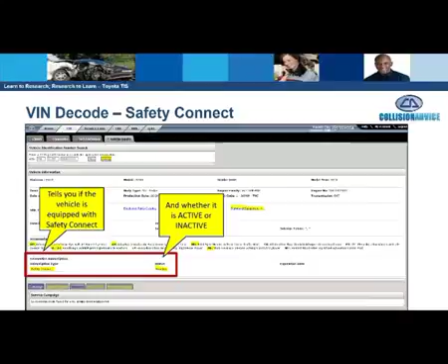If you do not, then Toyota could be notified when you start disassembling the vehicle, and in Toyota's mind, they may think there's a problem with the vehicle, and then they contact the customer, and the customer may end up getting an email. So it's very important for you as a collision repairer to decode the VIN in TIS so you can see if they subscribe to Safety Connect or not.

Now, here's an example we found when we found a vehicle that was subscribed to Safety Connect. This was a 2018 Toyota Camry. We actually saw an option here that says when automatic collision notification is activated, there's a process you have to go through to disable this. This is going to be very important to all collision repairers in the future before you begin work on any Toyota Lexus vehicle, to understand if the customer subscribes to Safety Connect.

Now, another thing you will see is when you decode the VIN, it also gives you all the vehicle options. I really like this because this helps me to make sure I select the right part on the estimate the first time. The other thing is some of these keywords like navigation, intuitive park assist. These are some of the things that I'm going to be using in the search feature later on to determine how to do a proper repair on this vehicle.

Here's another benefit of understanding the build data. You know, if you were to go and fix a Toyota Camry, you would see on the side of the deck lid it says SE. So I know when I go to write my estimate, I need to select the parts for an SE.

However, as many of you are probably aware, when I go to write an estimate on a Toyota Prius, it will only say on the deck lid that it's a Prius or a hybrid. It will not have an emblem such as the Camry does with the SE. So I will not know what the trim code is on that vehicle. And if I don't know the trim code, I may not select the right part.

A lot of times the estimating system, CCC, Mitchell, Audatex, while they do get some build information from the OEM manufacturers, they can't always drill down and tell you what trim package is on that vehicle. So the only way you would know is to either decode the vehicle through TIS or call your local dealership, so we can select the right part the first time.

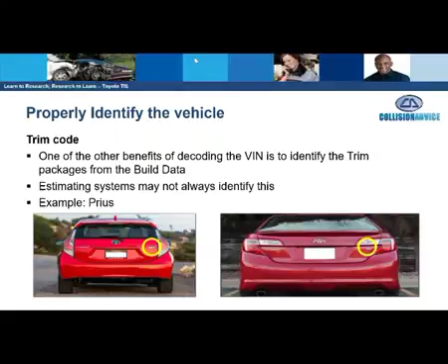Okay, let's continue on. So, now what's in the library tab? So again, when I go back here into TIS and I log in, you're going to see a tab that says TIS. And when it opens up, you're going to see several options: library, diagnostics, tech assist, or vehicle inquiry. Now, vehicle inquiry was obviously where I put the VIN number of the vehicle in, and it decoded it for me. The other tab that you're probably going to most commonly use is going to be the library tab. Now, when I select the library tab, you're going to see several tabs along the bottom. So let's share with you what some of these tabs mean. The first tab you'll see on the left-hand side is the summary. This is going to have a summary of all manuals.

The second tab is SB-TT, and that stands for Service Bulletins and Tech Tips. It is in this area that you might find some technical tips as well as service bulletins that may pertain to something like scanning. Then you have QTG, which stands for Quick Training Guides. This would be some quick training guides that might tell you how to perform, for example, a 0-point calibration. And then you have RM, which stands for Repair Manual.

I will tell you that if I had to pick the 2 tabs that you will utilize the most as a collision repairer, RM will be the first. The Repair Manual is the tab you're going to select that's going to tell you how to take a vehicle apart. If you've never had a bumper off before, you've never had a fender off before, it's going to tell you how to remove that component. It's also going to have your different specifications, any work notices, precautions, or calibrations.

The next tab is EWD, which is electrical wiring diagrams. And then we have NCF, which stands for New Car Features. We're not going to get a chance to talk too much about this tab today in the webinar due to the time restraints. However, I want you to know that I love this tab. I like to look at this tab because it tells me any new substrates that may be on the vehicle, as well as any new pre-accident or pre-collision avoidance systems.

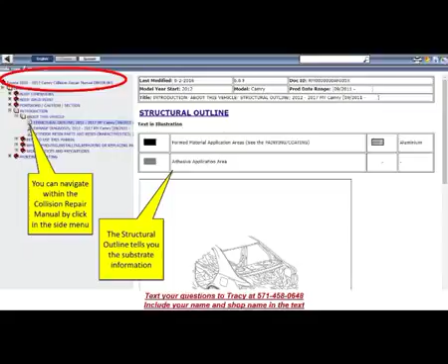So you'll see, for example, the structural outline is how we found out what this vehicle was actually made out of, what components it was made out of. In some cases, maybe if it was a hood, it would show you the hood was aluminum, for example. Now, here's one of the other things I liked about it: it's also going to show you on the structural outline what types of steels are on this vehicle. And this is very, very important to you in regards to whether that component can be repaired or replaced or sectioned or not.

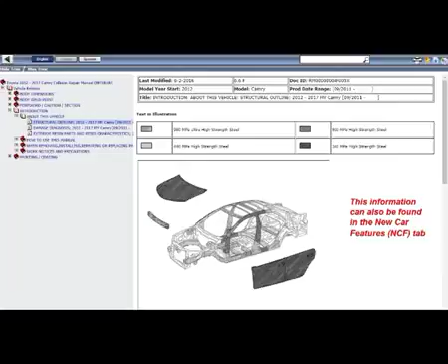Keep in mind, also, these new types of metals used in the vehicle's manufacturing process can also be found in the NCF or New Car Features tab. Now, I'm going to share with you my favorite thing. I've got a lot of things in TIS I love, but this was my favorite. There was something called a damage diagnosis document.

So I went into CR, which is the Collision Repair Manual tab. I then navigated the decision tree down to where it says damage diagnosis, and you'll see that's right under the introduction tab. I love this damage diagnosis document. I've never seen anything like this with any other vehicle manufacturer. And let me tell you what this does. This shows you, based on this specific vehicle, if this vehicle is in an accident, how the inertia forces are designed to transfer throughout the vehicle.

Now, let me tell you why that's important, because that's going to tell me as an estimator or a technician where I need to look for damage. So for example, I'm going to switch to the next page here, and again, this comes right out of Toyota TIS. It's called the damage diagnosis document. And it tells me if a vehicle was hit along this bumper reinforcement, the inertia forces are designed to travel up along the A-pillar, along the roof area, as well as down low along the rocker panel.

But it's telling me areas like number 1, 2, 3, 4, 5 are areas that Toyota designed to give. Some people might call these crush zones, right? So I know on this specific 2018 Toyota Camry, I need to inspect those areas. Now, this may mean that I've got to remove the cowl cover and the wiper arms to look at the cowl area. Well, you know what? If that's what you have to do, that's what you have to do. I would encourage you to itemize that on your estimate, along with a line note on what made you remove those components. But I love this document from Toyota.

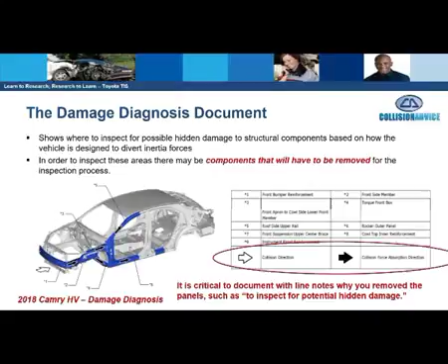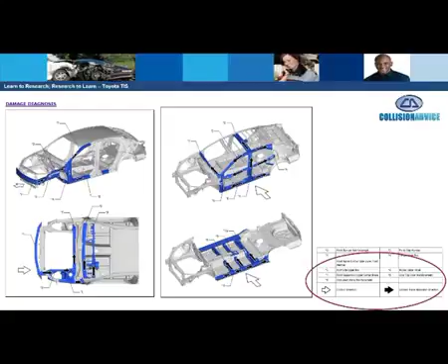Here's another example of a damage diagnosis document showing you that this vehicle got hit on the side, where the center pillar is. It's actually made to divert the inertia forces along the door intrusion beam and direct that across the firewall. I've got to tell you, in my lifetime, I didn't always look at the firewall for damage, but I will from now on, thanks to Toyota's damage diagnosis document.

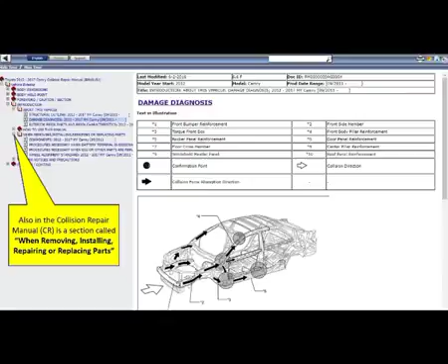Here's another cool thing we found in TIS in the Collision Repair tab, and that is procedures needed when you disconnect a battery or R&I other parts. So again, we went to the Collision Repair Manual, and in the decision tree on the left-hand side, we saw a little arrow that says, when removing and installing, repairing, or replacing parts. So we selected this, and you'll see something came up that said procedures necessary when a battery terminal is disconnected or reconnected.

Well, I got to tell you, if you go to replace a fender on some Toyotas, there's a ground wire that you have to disconnect. But before I do that, I have to disconnect the battery.

In this case, if I would not have researched this and disconnected the battery without going back to correct the steering angle neutral point afterward, the parking assist monitor system would not work, and that could lead to a consumer having an accident. Yeah, you heard it right.

When we disconnect a battery, not just on a Toyota but any vehicle, like a Lexus, you need to research to see what procedures are necessary when you disconnect the battery terminal. By the way, I got to give a shout out to my friend Jake Rodenroth with asTech, because he's the one that taught me about this.

So again, anytime you're going to disconnect a battery on a Toyota or Lexus vehicle, you need to research under the Collision Repair Manual tab what procedures are necessary. The other good thing about this is it shows you what the possible problem could be if you don't do this procedure.

You'll look right here, it tells me that when I disconnect the ECU, there are other things I have to do as well. Or let's go a step further.

How about this one? When I go to replace a door or a door window regulator, it tells me that I actually have to initialize the power window control system. If I don't, the up and down function won't work, and some of the other things won't work as well. So at the end of the day, it's important that when we disconnect any type of component, we go to this section of TIS to see what types of initializations or calibrations we need to do.

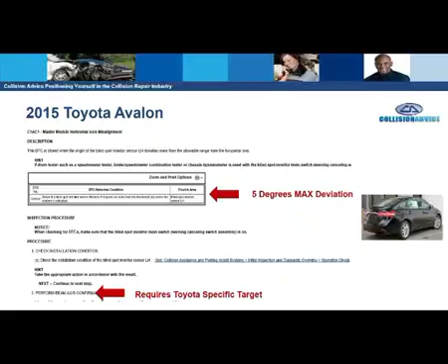So what we did is we said, let's go to the authority, which is TIS. We went back to the collision repair manual, navigated the decision tree on the left-hand side, and found a section with plus signs that says 'removing, installing, repairing and replacing parts.' Once we selected that, it dropped down and there was a tab that said 'precautions for blind spot monitor.'

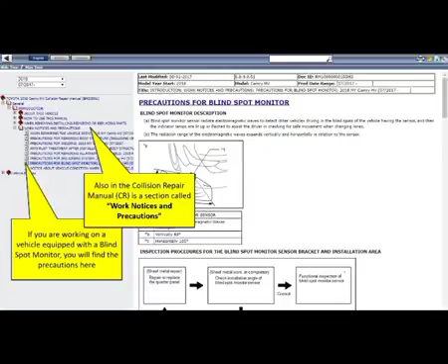So we researched this, and one of the things we saw was that Toyota actually says: repair or replace the quarter panel, then check the installation angle of the blind spot monitor sensor. And if the blind spot monitor sensor will not align properly, go back and either re-repair or replace the quarter panel.

So what we need to understand is, it's not just about calibrating the blind spot monitor after the vehicle's been completed. It's about actually checking the angle of the blind spot monitor before you paint the vehicle. So even if you replace the quarter panel, you should check the angle of the blind spot monitor. That also could include reinstalling the blind spot monitor and the bumper cover, and then after we take them back off, paint the vehicle, we have to reinstall them again.

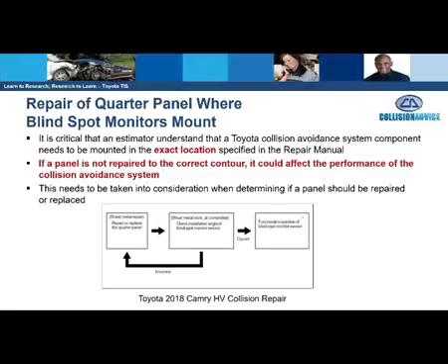So this comes directly from Toyota. You'll see what Toyota says right here in TIS. And by the way, Toyota has a publication they publish quarterly called the Collision Pros magazine. This actually came right out of the Collision Pros magazine produced by Toyota in the summer of 2017.

It says, when you repair or replace the quarter panel, check the installation angle and the orientation of the blind spot monitor. Then you will refinish the vehicle. Once you refinish the vehicle, you'll have to go back and calibrate the blind spot monitor. Keep in mind, the initial orientation and installation angle check will be done with a plumb bob, and there's a certain procedure through Toyota TIS. The calibration requires the use of a factory scan tool as well as a very specific target.

Another thing we learned about was, a lot of times we see people really focused on repair versus replace, and we understand that as an industry. But we want to say, with all these new active avoidance systems, how do I know if I can actually use any filler material to repair this bumper cover? It's a big concern that I would have as a collision repairer. So one of the things we did was reach out to Toyota and ask, how will I know if it's okay for me to fix this bumper cover or not?

Toyota taught us to go into the collision repair manual and navigate to the decision tree. You'll drop down and see where it says precautions for blind spot monitor, and you'll see what Toyota says in TIS.

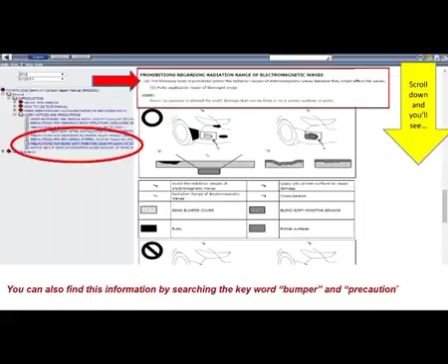Now let's talk a little bit about welding. When we go to the collision repair manual, welding is a big deal. Navigate down to the left side of the tree and you'll see where it says precautions for welding. When selected, it tells us a lot about what we need to do for a proper repair involving welding. You'll notice it says if the paint film is damaged, make sure you refinish the part.

What are they speaking of? Weld burn damage. So if you weld in a new quarter panel or rocker panel, Toyota insists that you must prime and paint those adjacent panels from weld damage.

In this same tab, if you scroll down, it tells you the types of welds, wire type, or gas needed, as well as the number of welds you may need. This is really important to make sure you're using the right welder with the right type of weld, gas type, and wire type.

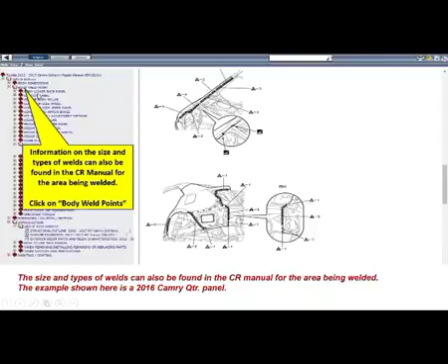In addition, in this same section, you'll see something called a body weld point. If I click on this, the next thing I'll do is drop down to where it says quarter panel, because it shows me everything that welds into a Toyota.

If I click on quarter panel, for example, it shows me exactly where this quarter panel is intended to be welded, where it's supposed to be replaced, what types of welds, etc. So go to body weld point, and it'll show you all the different components that weld into a Toyota and the proper welding procedure.

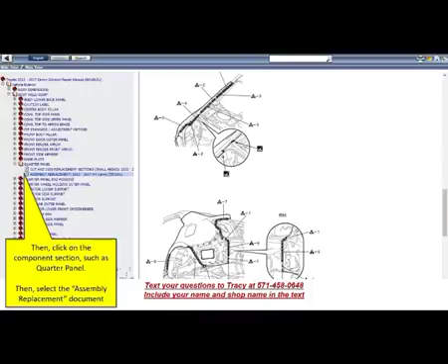You'll also see in this same section, as I scroll down, if there's any panel bonding adhesive required by Toyota. You'll see that Toyota calls out a very specific part number, which in this case is 3M panel bonding adhesive 8115.

It's always important to only use the adhesives approved by the vehicle manufacturer. If another company tells you it's okay to use their product, but it's not approved by the OEM and you don't see it in the OEM repair procedures, do not use that stuff.

What else does Toyota say about welding? First, Toyota states the battery should be disconnected prior to welding. Toyota states that any electronics within 18 inches of the weld site should be removed. For example, if you're replacing a quarter panel, you may have to remove an airbag sensor, the overhead airbag, the wiring harness, a speaker, etc.

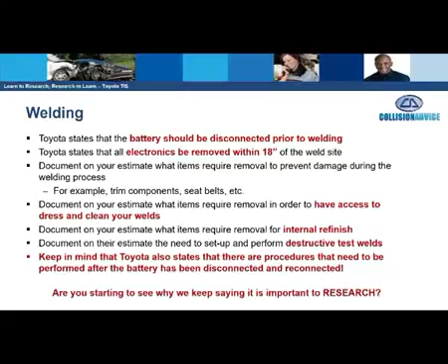Also think about what types of things you need to remove from that Toyota or Lexus in order to dress and clean your welds. Toyota also states that you need to set up and perform destructive test welds before welding on one of their vehicles. Keep in mind that if Toyota says to disconnect the battery before welding, we also need to understand what procedures we may need to reinitialize or recalibrate when we reconnect the battery. Toyota actually has something called a CRIB bulletin.

That is collision repair information bulletin number 161 that says disconnect the negative battery terminal and remove any electronic units within 18 inches of weld sites. Now this is really important because other vehicle manufacturers only say 12 inches. iCar states 12 inches, Toyota says 18, and the same would apply for Lexus.

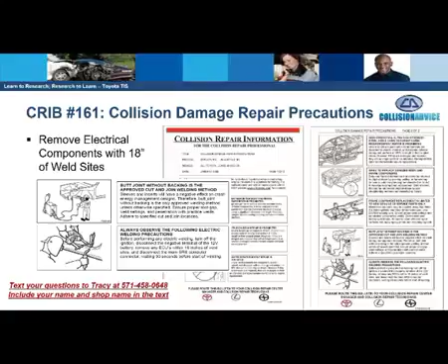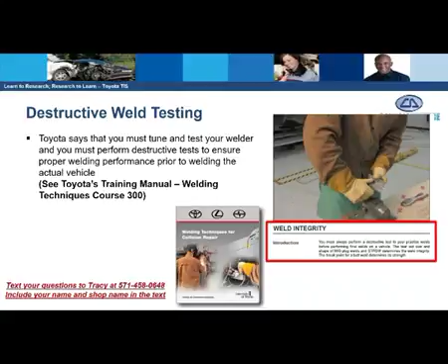You also see here that if you were to become Toyota certified and take a welding test for Toyota certification, Toyota clearly states in their training manual that you must always perform a destructive test on your practice welds before performing final welds on a vehicle. Keep in mind, a destructive test weld is also a not-included operation. If you're not sure, submit an inquiry to www.degweb.org, and Danny from the DEG would be glad to get you an answer on that from CCC, Mitchell, Audatex. But performing destructive test welds is required by Toyota and is a not-included operation.

You also see that Toyota has a CRIB bulletin on this, Bulletin 181.

Tracy, you said we have another question. We do, a couple people want to know, can independent shops be Toyota certified? Currently today, you cannot be a Toyota certified shop unless you're owned by a dealership. However, if you have sponsorship from your dealership, you can send your employees to factory training. You will not be certified, but you can still gain the factory training that certified shops go to. But currently, you cannot be a certified body shop unless you're owned by a Toyota dealership. Again, Toyota training is available to you if your dealership will sponsor you.

Augie, did I get that correct, sir? Yes, absolutely. Independents can get factory training, and basically that's the most important thing in our industry, to repair Toyota and Lexus vehicles correctly and safely for our customers.

Thank you, Augie. Another question, Augie: is there a list of approved welding equipment on TIS? Toyota does not endorse or recommend specific equipment or require specific brand names. What Toyota does, or Lexus for that case, is give you the specifications for the equipment. Is that correct, Augie? Correct. If you notice in the repair manual, it says you must use a welding machine that has inverter technology, at least 10,000 amps, with a capacity of 685 pounds pressure.

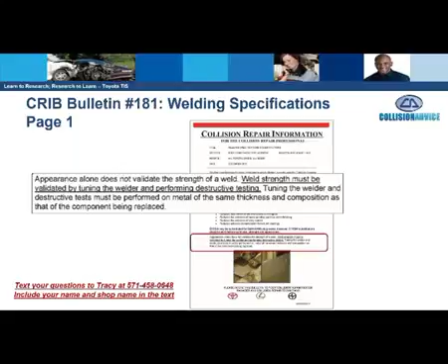Okay, we have a question from a body shop in California about blind spot monitors, and we're going to hold that question a little bit more until we get into it, Tracy. But we will answer your question. Okay, look right here what Toyota says also in TIS.

It says that your welding substitutions should match factory spot welds in size, strength, and appearance. If replacement welds are larger or smaller, resize the electrode contact tip to match, and do not weld over factory weld locations. My question for you is, how would this influence your decisions on LKQ or salvage quarter panels? At the end of the day, I don't believe my opinion means anything. I think the only thing that matters is what I can prove, substantiate, or justify. When it comes to used quarter panels, I would have to question you: can you actually match the factory spot welds in size, strength, and appearance? I think you would find, in putting a used quarter panel on, you would not.

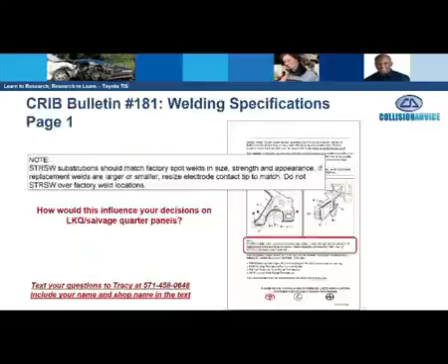Now, how do you find these crib bulletins? A lot of times people talk about crib bulletins. Well, first of all, what you can do is go into TIS, into the CR tab, which is collision repair, and where it says keyword, you can type in the word crib, or if you know exactly what you're looking for, crib welding, and that is how it will pull up all of your crib bulletins for you to see. Now, some of the other things Toyota has in TIS is under the collision repair manual.

You'll see here on the left-hand side in the decision tree, it says work notices and precautions. When I look at this, this is where I'm going to find precautions that Toyota may have, like not to repair a door intrusion beam, or not to repair a bumper reinforcement. That's where you're going to find those types of information.

However, one of the other things you'll find is where Toyota has very specific requirements into how you attach a Toyota or Lexus vehicle to the pinch welds. You'll see that Toyota very clearly states, and this would be in the United States Toyota crib bulletin 57, and if you're in Canada, it would be 2027, that you must remove all coatings at contact locations that may build up on clamps and reduce their gripping ability.

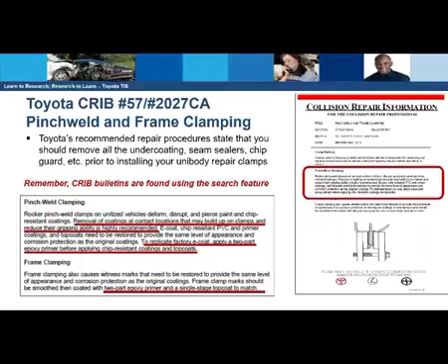So at the end of the day, we need to make sure that we remove any undercoating or seam sealer from the pinch welds before we put a clamp on a pinch weld. Understand again, how would you classify that on an estimate? That might be prep pinch welds before and after clamp installation. But clearly understand, if you're taking and putting a clamp over undercoating or seam sealer on the pinch welds of a Toyota or Lexus, they consider that an improper repair.

Sectioning locations. How do I know when and where I can section something? Well, first of all, Toyota has a crib bulletin on that, crib bulletin 176, that has some very specific requirements in regards to what you can and cannot do in regards to repair methods. One of the things you'll see is on the right-hand side where it says methods not approved, it says butt joint with backing or a sleeve is not approved. If you're an estimator and you're writing on an estimate to use a sleeve when replacing a quarter panel or rocker on a Toyota, that is an improper repair, and it's important to ensure that your technicians are not doing that.

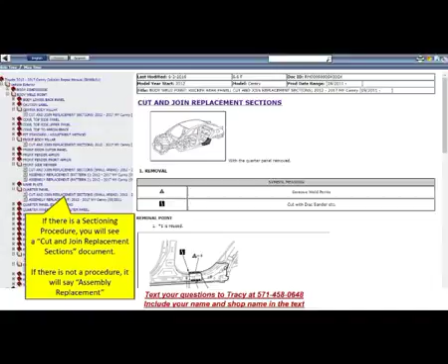Now, if I go to the decision tree again on the left-hand side, you'll see where it says body weld point. I'm going to click on that, and as I click on it, you'll see it drops down to a variety of panels. It also says, after I select a component, such as a quarter panel for example, it's going to come up, and that's where I'm going to find out if I can section that component or if I need to replace it in its entirety. So whether it's a quarter panel or a rocker panel, I'm going to go to body weld point, click on that, it's going to open up a decision tree, and then I will select the specific panel that I'm going to weld and replace. When I click on that, it will tell me if that panel can be sectioned or not, or where it needs to be installed at, again, the proper welds, etc.

Let's talk a little bit about adhesives.

Obviously, there's a court case that the industry is talking about quite a bit down in Texas, and it was a question about whether structural foams or adhesives could be utilized in repair. Toyota does recommend some panel adhesive, but it is in very limited applications. So the only way you can know for sure if a Toyota or Lexus vehicle says it's okay to use panel adhesive is if it is actually documented within TIS or on a CRIB bulletin.

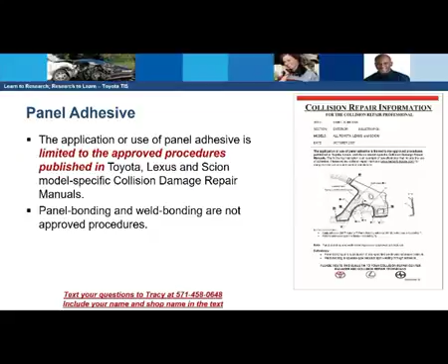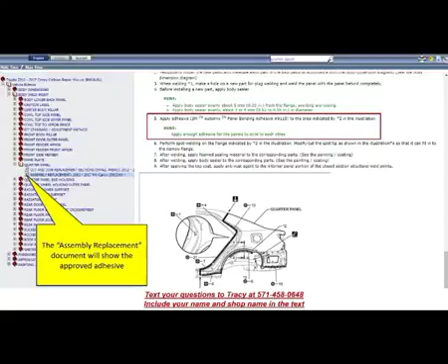You'll see here, for example, in this instance, I went to the body weld point. Once I selected that, I went to quarter panel. Once I selected quarter panel, it told me here in this instance that I could use 3M panel bonding adhesive 8115. So in this instance, in this specific area, and only in this specific area, can I use panel bonding adhesive, not in any other area.

Also, one of the other things that I think a lot of industry members are not aware of is most of these panel bonding adhesives have very specific cure times. If you look here at Toyota, for example, it says here that the vehicle must dry for 60 minutes at 60 degrees Celsius, which is 140 degrees Fahrenheit, or at 77 degrees Fahrenheit for 12 hours.

I hate to tell you how many shops I've been into where they put the adhesive on when they were using a quarter panel, and it just sat in the shop during lunch or something, and the very next thing you know, they rolled it over to the paint shop. Well, when you do that, you're moving that vehicle before it's completely cured. So make sure on all vehicles that you check the cure time on that adhesive before you move that vehicle after you replace the panel and utilize it.

Let's talk a little bit about corrosion protection. Toyota has a very good CRIB bulletin on this. It is CRIB bulletin 186. It tells you the different types of corrosion protection materials that are used on a Toyota or a Lexus or a Scion vehicle, and in some cases even recommends or specifies specific products.

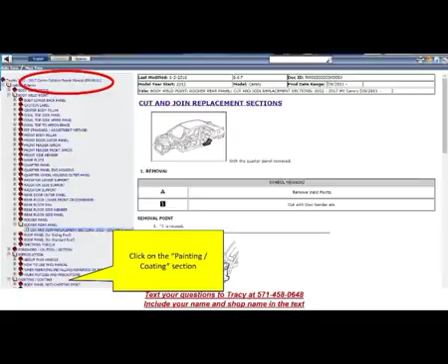Let's go back down here again, where I go to the Toyota Camry Collision Repair Manual tab. And when I drop down underneath body weld point, you'll see at the very bottom it says painting and coating. Once I select that, you will now see the different types of corrosion protection. So very clearly understand this: your corrosion protection information in Toyota's TIS is going to be under the painting and coating section.

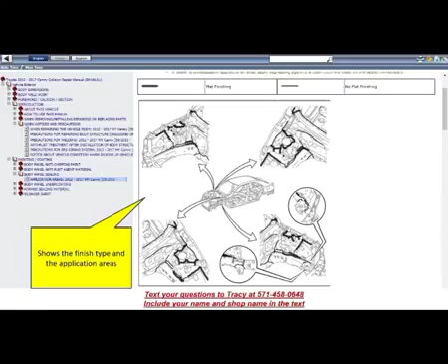When I go to that section, I will now see anti-chipping paint, which is like gravel guard, anti-rust agent, which would be things like cavity wax, then sealer, which is like seam sealing or foams, and then undercoating. So it's really important we go here, and it will actually tell us what type of finish is supposed to be on there. You'll see in this case, is it a flat finish or no flat finish? And it's going to show me the specific areas that are required to be seam sealed after the replacement of this panel.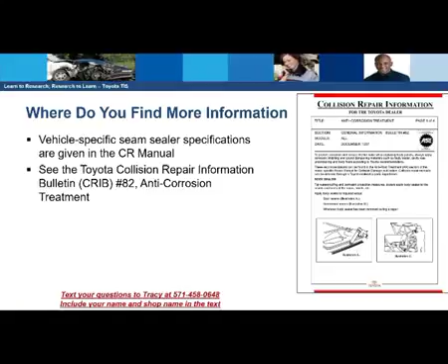Again, Toyota also has some very good CRIB bulletins on this, and another would be CRIB bulletin number 82. You will see here again, if I go to body weld point, I select that, I go to quarter panel, I go down to where it says cut and join replacement sections. Once I scroll down, you'll see again here, it tells me that I need to apply seam sealer to this very specific part.

Let's talk a little bit about painting, because a lot of times we look at OEM repair procedures and we think it's only important for the body man to know how to do certain things. But you know what? It's important to the painter too. And here's why. Many vehicle manufacturers, including Toyota today, are using what's called LUTs. LUTs are limited use toners. These are toners that are used very infrequently, and they only have a small number of colors. And most collision repair centers do not stock these LUTs.

So you would actually have to identify that this vehicle had an LUT, limited use toner, during the estimating process, so we could contact our jobber and get the toner in time. Also keep in mind that Toyota now actually has some quad coats. So when we go into TIS, we're going to go to vehicle inquiry, we're going to decode the VIN, and you'll see at the very bottom it tells me PC, which is paint code.

It tells me PC is special color. That this vehicle is exterior color 03T7 hypersonic red, but you'll see where it says accessories. This vehicle has a special paint code on it. That tells me automatically that I probably need to research this on my paint scale, because it may require a limited use toner that I need to contact my jobber or paint manufacturer to get in advance.

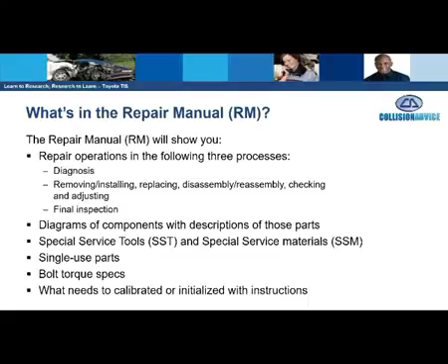So let's go ahead and show you a little bit about what the repair manual tab will provide you throughout TIS. First of all, if I go to the RM tab, repair manual, and then I go down and I just select any of these little icons I see there. So any one of these, once I select those, it's automatically going to pop up my decision tree. Now I will go down to where it says vehicle exterior or vehicle interior.

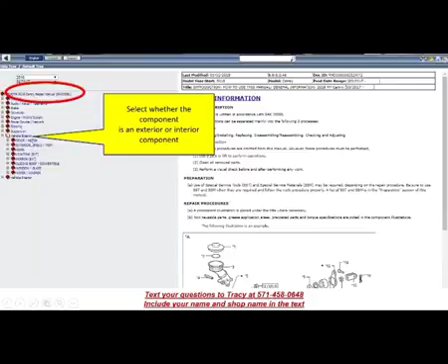If I go to the vehicle exterior tab, for example, and I click on trim, and then I click on the rear bumper, you will see here that it automatically pulls up for me and tells me what I need to do in order to remove and replace that bumper.

However, not just does it tell me what I need to do to remove the bumper, but it tells me that there are some necessary procedures such as measurement of ultrasonic sensor detection angles and also ultrasonic sensor detection angle registration. And it tells me that if I do not do this procedure, then these things over on the right-hand side will be inoperative. So understand, this is something as simple as I just removed the bumper.

So the vehicle was key scratched. It was not even in an accident. It's just a key scratch. But I had to remove the bumper cover in order to paint the quarter panel. Well, after I removed the bumper cover, you can clearly see here that Toyota says there are some recalibrations that need to be done in regards to the ultrasonic sensor detection angle. Understand there are a lot of things that require the utilization of a scan tool that don't involve scanning.

One of the other things I'd like to point out to you is anytime you see one of these little blue boxes that says info, that will be a hyperlink, and when you click on that, it will open up and show you more information. So let's look here for example, right? It says necessary procedure after parts are removed. Once I remove a bumper, I actually have to do this necessary procedure, and if I don't, these things on the right side will not work. You can see down here, step by step, it tells me how I actually need to do this process.

Now, this was something that was shared to us by some of our good friends in Canada. This was a 2018 Toyota Camry. And this vehicle has a feature that's called Park Assist Monitoring, Intelligent Clearance Sonar System. So here's what we need to understand. In this case here, all I did was remove the bumper cover. It wasn't even an accident. I just removed the bumper cover.

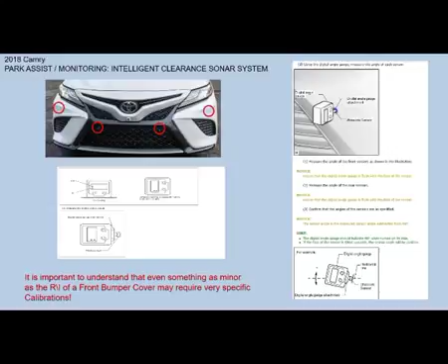However, more importantly, when we go over here, we will see that Toyota says further in TIS, when the front bumper is damaged or deformed due to an accident or contact with other objects, or the bumper installation is repaired, it is necessary to perform millimeter wave radar sensor adjustment. It says it is necessary.

You know, I know we got a question earlier about why Toyota sometimes does not use really strong language like required, and they just use recommended. I will tell you in the position statements, you will generally find verbiage like recommended, but where you find the strong words is when you really dig down into TIS, like in this case where it says it's necessary.

You also see right here that Toyota also says, when replacing the windshield glass of a vehicle equipped with a forward recognition camera, make sure to use a Toyota genuine part. If a non-Toyota genuine part is used, the forward recognition camera may not be able to be installed due to a missing bracket, or the lane departure alert system, forward recognition camera system, et cetera.

And the bottom line is basically what it's telling us is that these safety systems may not work properly if we use an aftermarket windshield. All of this, again, would be found under the repair manual tab, and you would find this specific example under removal of the windshield.

Let's talk a little bit about special service tools and special service materials. Special service tools and materials can be found under the RM or the repair manual tab. Once I select the repair manual tab, my decision tree will pop up. I will go into where it says preparation. Again, I'll say that word again, preparation.

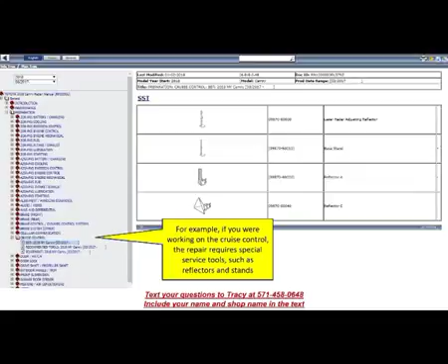So it's not just enough to have a scan tool, it's going to show me the specific targets that I'm going to need. You will see also here that if I look at the door latch and the door hatch, it actually tells me there is a specific adhesive that is needed for this area as well, and it gives me the part number.

Let's talk about non-reusable parts. One of the things that Toyota does a great job of in their Toyota TIS is it shows you a symbol to indicate when a part is non-reusable. That means a one-time use part, and that is anytime you see a black dot.

So if you're taking this webinar right now, I'd like you to take a pen or pencil and make a note somewhere and draw yourself a dot. Anytime you're in TIS and you're in the OEM repair procedures and you see a black dot, it means that part is one-time use and it must be replaced, even if it's not identified in the estimating system.

So if you look here, Toyota actually has a key. A black dot means a non-reusable part. The arrow means that part requires a multi-purpose grease, and the asterisk means it's a pre-coated part, meaning it could be a ceramic coated part or something similar.

So in this instance, if you were replacing a door or a door skin, you will see that there are 6 different black dots that Toyota says these parts are one-time use and must be replaced.

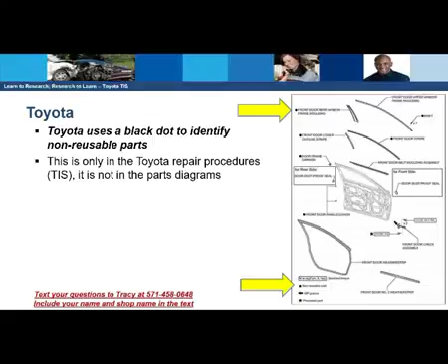So how would I find that, for example? Well, I'm in my repair manual tab. From there, I go to vehicle exterior. From there, I click on door. Once I select door, it pops up, and all of a sudden I see 2 black dots there.

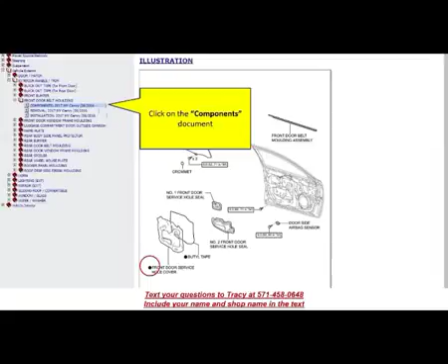One of those black dots tells me that the front door service hole cover is a non-reusable part. That would be the vapor barrier or moisture barrier. So again, it's really important that for any components you replace, you go into TIS and look at those components to see if there's a black dot.

Now, Toyota also has a crib bulletin that you can use to prove this to an insurance carrier if you need to, or an insurance carrier may need to use it to prove to their supervisor that they had to replace this part because it was non-reusable.

On Toyota Crib Bulletin 188, it says Toyota does not recommend that you reinstall non-reusable parts. Those would be, for example, tail lamp gaskets, emblems, clips, grommets, etc.

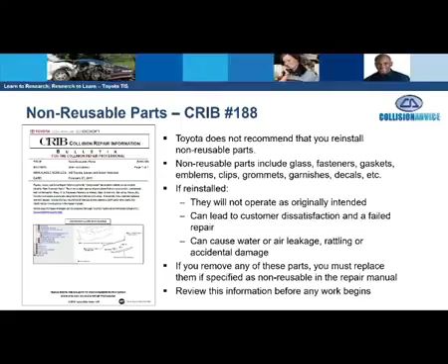Also washer nozzles. Now, Toyota does have an electronic parts catalog that the industry can actually access. You can access Toyota's electronic parts catalog, and it is free. However, understand there are some differences between the parts graphics you see in the TIS and the parts graphics you see in the electronic parts catalog.

TIS will not give you part numbers. An electronic parts catalog will. TIS will identify for you what's non-reusable with a black dot. The electronic parts catalog does not. So it's not a matter of using either or, it's a matter of actually using one to complement the other.

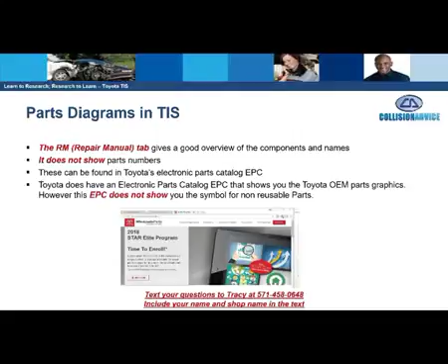Let's talk a little bit about bolt torque specs. One of the things that's very concerning to me is that people don't always take and torque their bolts back to the proper specifications it should be.

So if you have to remove a seat belt for welding purposes, like on a quarter panel or a center pillar or rocker, it's really important that you research for your technician what the torque specs are on this.

Also, keep in mind that some of your Lexus vehicles will have ceramic coated bolts, that's for some of their aluminum panels. Those ceramic coated bolts, if you torque them too tight, you'll crack the ceramic coating and it will cause galvanic corrosion. So it's very important that you research your torque specs on something as simple as a hood bolt.

Let's talk about scanning. While a lot has been said about scanning, we're not here today to get into a webinar on scanning. That would be in our part 2. One of the things I want you to see, though, is in Toyota's CRIB Bulletin 191.

It says, considering the fact that a capable scan tool is the only way to identify some DTCs, Toyota requires that repairers... and you see right here it says the word requires, does not say the word recommend.

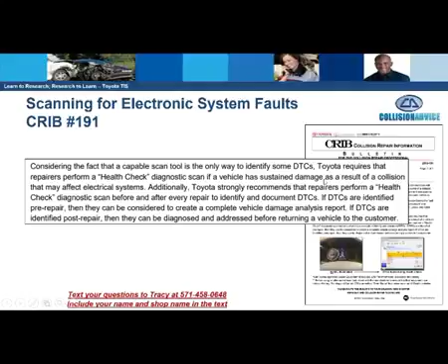Toyota requires that repairers perform a health check diagnostic scan of a vehicle that sustained damage. At the end of the day, that is a case where Toyota uses a strong word. But keep in mind, it's not just about scanning the vehicle. It's also about initializations and calibrations.

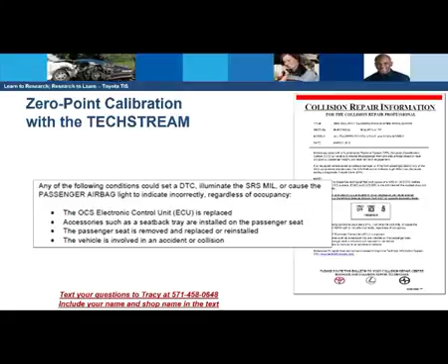One of the things Toyota and Lexus state is that if a vehicle is in an accident, you must do a seat calibration on it, what's called a zero-point calibration, depending on the year of the Toyota or Lexus. Basically, Toyota and Lexus state you need to do this even if the vehicle is unoccupied, even if the airbag did not deploy. If you do not do it, there's a possibility the airbag may not deploy at the proper timing in the future. Toyota has a CRIB bulletin on this, CRIB Bulletin 177.

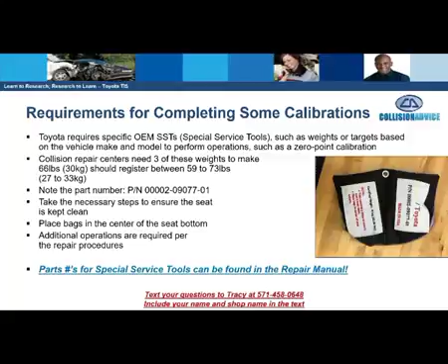Don't forget, when you disconnect a battery, Toyota has very specific procedures of things that may need to be initialized or recalibrated after you reconnect the battery terminal. Also, Toyota requires some specific seat weights or specific targets for some of these calibrations, and those can be found in the repair manual.

Also, a couple other things about scanning. If you go to Toyota's website, crrtraining.com, they have a section with all their Collision Pros magazines, which Toyota publishes quarterly. One of the things Toyota did in Collision Pros Fall 2016 was publish an article to debunk some of the myths people have regarding scanning.

For example, somebody submitted the question, if the dash lights are operating and there are no warning lights, is everything okay? Toyota's response was there are actually plenty of diagnostic codes that are not linked to warning indicators in the dash. Number two, since the vehicle being repaired wasn't occupied, do I still need to scan it? Toyota's answer is absolutely.

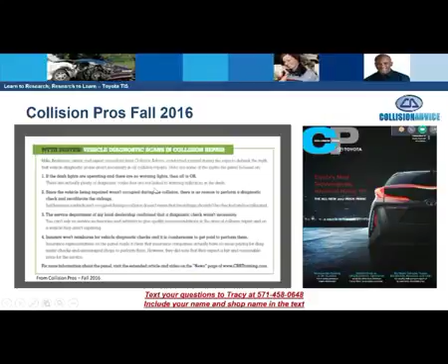Well, what about when my service department says it doesn't need to be done? Toyota actually says in their own publication, you can't rely on service technicians or advisors to give quality recommendations in the area of collision repair on a vehicle they are repairing. So at the end of the day, ladies and gentlemen, Toyota actually has what they call Mythbusters in their Collision Pros Fall 2016 magazine. Now let's talk about the New Car Feature tab, NCF.

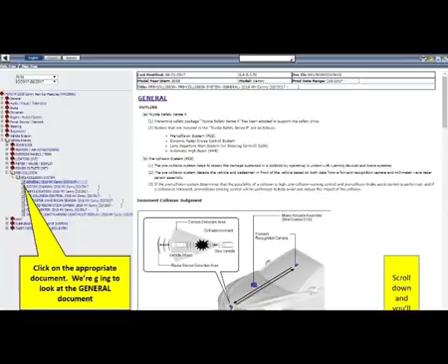Again, I love this tab. What it does is give me a general overview of the different components around this vehicle that may be new, especially if it's a pre-collision system. Let's look at this, for example. We have a brand new 2018 Toyota Camry, and we went to the NCF tab, New Car Features. We went down to where it says vehicle interior system, and looked at pre-collision system general, and it actually came up and told me where the different cameras were located on this specific vehicle, like behind the grille or in the windshield area. These are the types of things we need to know.

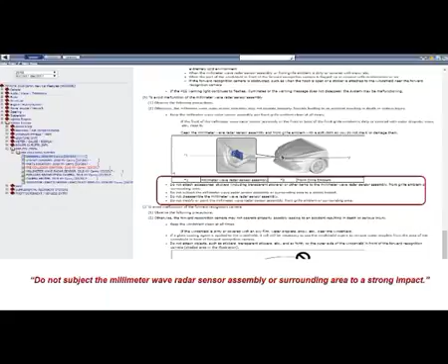Now, here's what was interesting. When I looked at this pre-collision sensor in the grille area, one of the things Toyota said was right here, do not subject the millimeter wave radar sensor assembly or surrounding area to a strong impact. So if I don't want to subject it to a strong impact and the vehicle takes an impact in that area, then I may have to consider taking a scan tool from Toyota, which would be a TechStream or TechStream Lite, and utilizing that to do a function or output test to ensure this sensor is working properly.

So let's talk about a few other resources Toyota offers. One is this website right here, crrtraining.com. When you go to this website, it's got some really awesome things. The first thing you'll see when you log in is it says Collision Pros. This is where you can view electronic versions of any of Toyota's past publications, as well as any recent ones. Again, they provide this quarterly, and I'd encourage you to download it, read it, and share it with your staff.

The next thing you will see when you go to crrtraining.com is where it says Tech Info. I select the Tech Info option, and you'll also see where it says Quick Training Guides. On the Quick Training Guides is where I have little handbooks that tell me how to do initializations after reconnecting the battery, or how to do alignments or zero-point calibrations.

Look at those Quick Training Guides. Those are really good, and that would help you technicians to understand, especially if you have a mechanic, how to do some of these procedures properly.

The other tab I like is News. If you go to News and it pops up, you're going to see where it says Categories. One of the things they have here that I really love is called Painter's Corner. They've got some awesome articles in there, as well as some videos you can share with your painters. And then you'll see a section that says Body Corner.

I will also scroll down once I go to the News section, and you will see any training news that may be available, like blind spot monitor or blueprinting the future. Then if you scroll down, you'll see a section that says Videos. There are some great videos in here that Toyota provides for free to the industry, like how to perform a health check, done by our great friend at Toyota, Eric Mendoza.

Until now, replacing radiators and condensers meant making a choice between expensive original equipment or questionable aftermarket parts. The new genuine Toyota radiator and condenser product line bridges that gap, offering genuine Toyota radiators and condensers at competitive prices. These aren't cheap universal fit products either. Despite being available for over 20 million vehicles currently in operation, each component was meticulously designed and tested to Toyota's exacting standards, meaning you'll get the right fit, the right part, and the right price every time. With Toyota's unrivaled engineering offering exact product-specific fits, these radiators and condensers match the performance of original equipment parts at incredibly competitive market prices. This product line is visible in all major estimating systems and is available now at Toyota dealers across the country, and comes with Toyota's genuine parts warranty.

But Toyota now actually has a new line, a value line of radiators and AC condensers. There's a flyer you can download from this presentation that will show you what Toyota has in regards to their value lines of radiators and AC condensers. And these prices are in US dollars, as Canadian prices may vary.

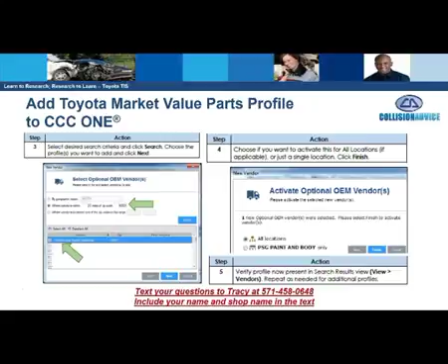So how do you set this up within your estimating systems? Well, if you're using Audatex for estimating, no special setup is required. The parts are visible by default whenever available, and if it's available through your dealer, it automatically pops up. If you use CCC ONE, currently you do have to set it up, but CCC ONE is moving towards being like Audatex, where it will automatically show right up in your estimating system under Opt-OE. And if you use Mitchell, there's no special setup required. The parts are visible by default whenever available, with no custom settings needed.

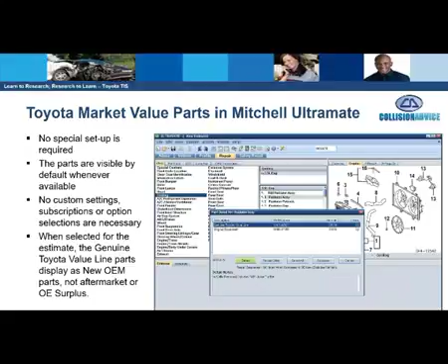Again, it will also show up on the estimate as a Toyota genuine part. You'll see here where it says genuine Toyota value line and then original equipment. Also, the local part is the economy line if you go into Toyota's electronic parts catalog, you will actually see it show up as the local part or economy part.

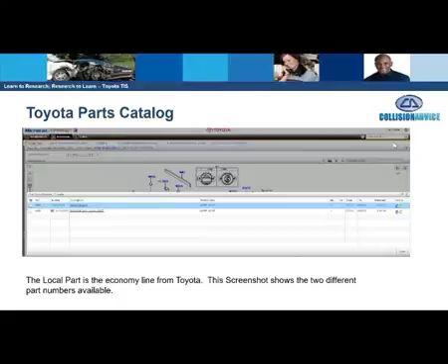Do not replace it with an inferior quality part. Toyota Motor Company is being really specific here, and this is not something somebody can interpret their own way. This is not a recommendation. This is a direct order. If you work on Toyota and Lexus vehicles, you must follow these guidelines. So this would answer some of the questions about the collision repair bulletins.